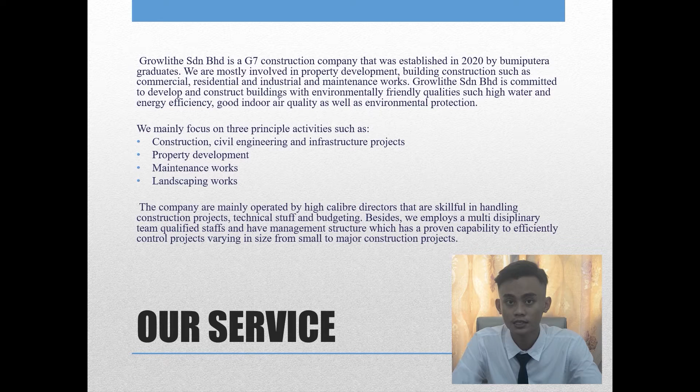Our licenses include SSM, which is Suruhanjaya Syarikat Malaysia, CIDB contractor license, and also SPKK, which means Sijil Perolehan Kerja Kerajaan.

To contact us, our address is first floor, lot 75, Jalan Kota Samarahan, Sarawak. Our telephone number is 082 966 120, our fax number is 082 573 491, and our email is growlithe@gmail.com. We also have our own website, www.growlithe.com.my. This is all from me.

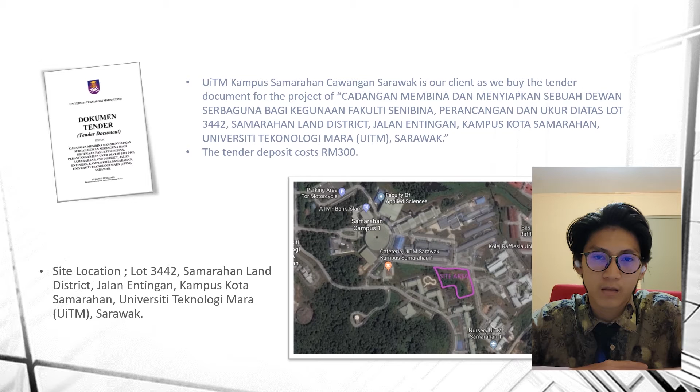First, the tender document. UiTM Kampus Samarahan Cawangan Sarawak is our client. We will buy the tender document for the project 'Cadangan Membina dan Menyiapkan Sebuah Dewan Serbaguna bagi Kegunaan Fakulti Seni Bina, Perancangan dan Ukur'. The tender cost is RM300, and this is the location of the site, which is behind Block G.

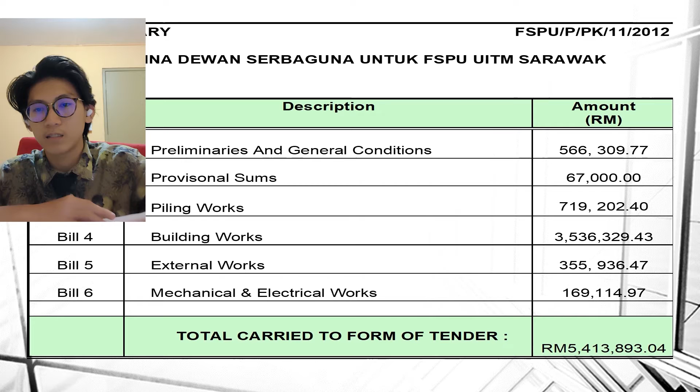Next is preliminaries, estimate, and build up rate. This is the final summary of our tender. It is divided into 6 bills: preliminaries and general conditions, provisional sums, piling work, building work, external work, and mechanical and electrical works. The total price of the tender is RM5,413,893.04.

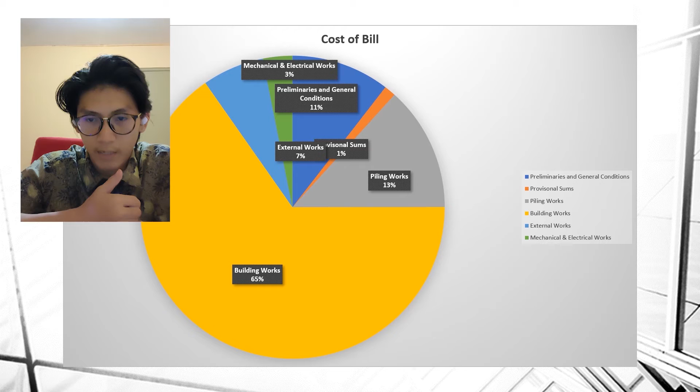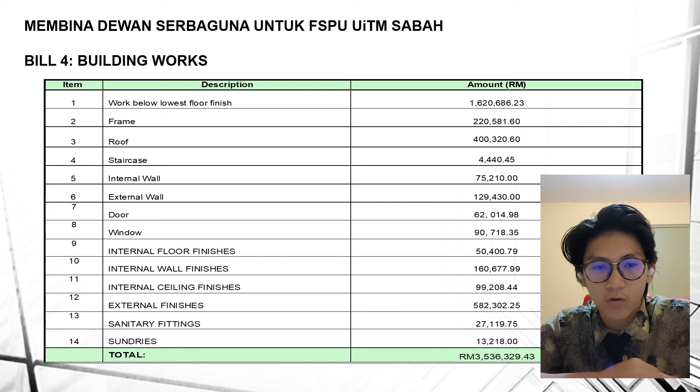Next, this is the cost of each bill in percentage. As you can see, the bill that costs the highest in this tender is building works, at 65% of the total cost of the tender. This is because building works cover most of the work in this project. There are 14 bills all inside building works, and they all require a lot of materials and labor following the design.

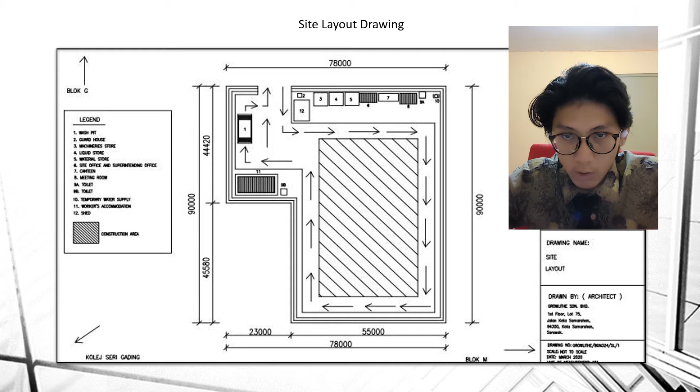So this is our site layout. The area of the site layout is 78,000 millimeters by 90,000 millimeters. The site layout consists of 12 temporary facilities: a wash pit located near the exit, a guardhouse at the entrance, machineries, liquid and material store, site office, canteen, and meeting room all in one line.

For toilets, they are in 9A and 9B as marked on the map. The temporary water supply and worker accommodation are behind the wash pit, and lastly, a shed is also one of the temporary buildings on this site. The site will be on the shaded area.

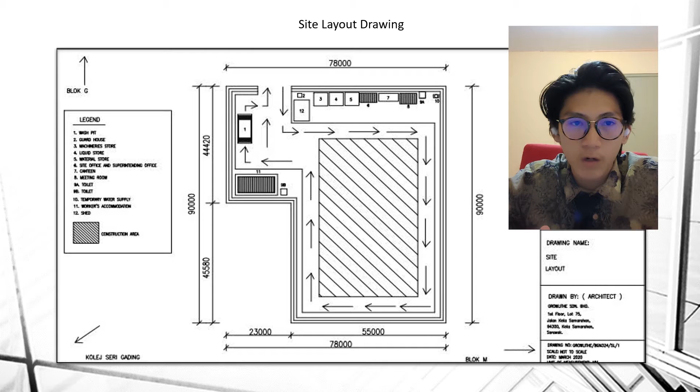Lastly, material suppliers. Our company has found a few suppliers that supply really good quality material at good prices. The best supplier for plaster render and screed coat is Hai Shun Concrete Sdn Bhd and Chuan Huat Group. Next, Sarawak Consolidated Industries Berhad supplies reinforced concrete piles. For ready mix concrete, we always get them from Cahya Mata Sarawak. Sarmaju Sdn Bhd is the supplier for brick and block.

We order doors from Seri Mega Industry Sdn Bhd. Next is Innovest Engineering and Corporation, which supplies geotextile, and PVC pipe supplier is Daiti Trading Sdn Bhd. Jubin BMS supplies tiles and marble. Nippon Paint Marketing Corporation Sdn Bhd supplies really good priced paint.

Next is Yang Kong Metal Work Corporation and Blue Corp Steel Sendirian Berhad, which supply and install metal, steelwork, BRC and steel bar. Lastly, KTS Timber Industry Sendirian Berhad is our favorite timber and plywood supplier.

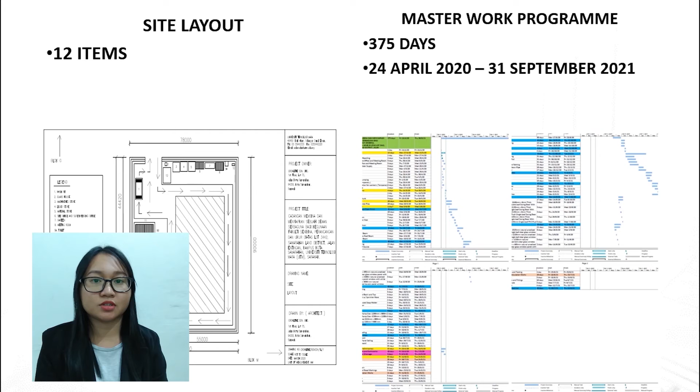Master Work Program is a tool for planning and scheduling a project that helps assess how long a project should take. For our project, the duration is 375 days, starting from 24th of April 2020 until 31st of September 2021.

The next item in project planning is cash flow. Cash flow is when costs will incur and the amount during the life of a project. It is related to the financial and physical S-curve. The S-shape is used to visualize the progress over time, plotting either cumulative work based on person hours or cost over time.

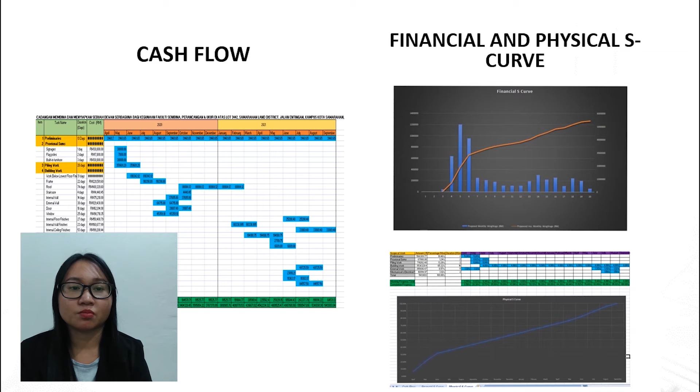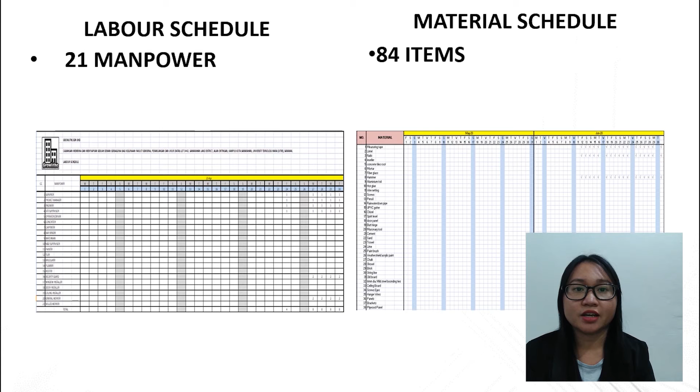For the labor and material schedule, there are 21 manpower for the labor schedule and 84 items for the material schedule. It is important to have the schedule when implementing a project so they can track the manpower and the material every month until the project ends.

Method statement is a description of how the work will be carried out safely. These documents are usually used for higher risk work to provide info to employees about how the work should be done and the precautions needed.

There are 14 items for our project in the method statements, with different durations in days and methods for installing certain items. For example, the installation of doors, the installation of windows, roof, and so on.

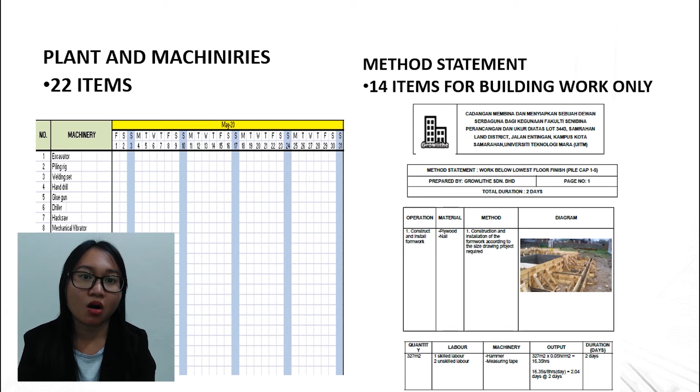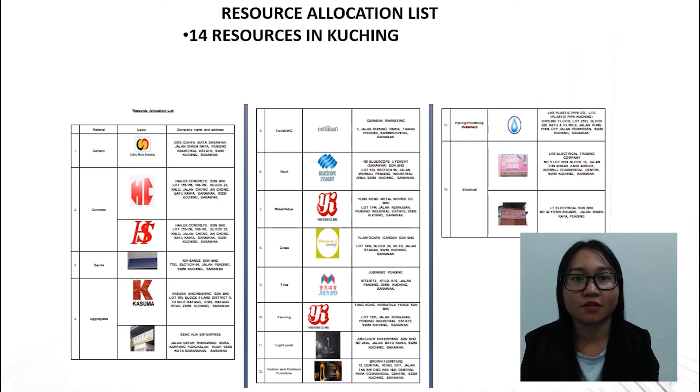Lastly, for our resource allocation list, our company has 14 resources in Kuching that supply 12 materials for our project. That is all from me.

Thank you. My name is Phoebe Saran Anak Rafael, and I'm going to present task 4, which is the progress report. In this task, I'm going to present the contract information, second the schedule for manpower, plants and machineries, and materials, and then I'm going to present the variation, the site safety and health report, the weather progress, and the progress photos.

First one is the contract information. As stated, this project title is...

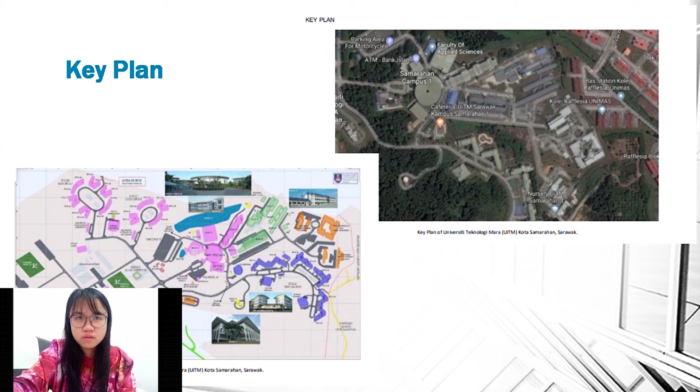Involved in this project is the preliminary works, provisional works, piling works, building works, and also the external works. So this is the key plan and the map for our university and also our site plan for this project.

The next one is the schedules for the plant and machineries, manpower, and the materials. This schedule is taken on the 6th month, which is September 2020. It shows that more manpower are needed in the 6th month because there are many works to do, and most of the works are done in the same month.

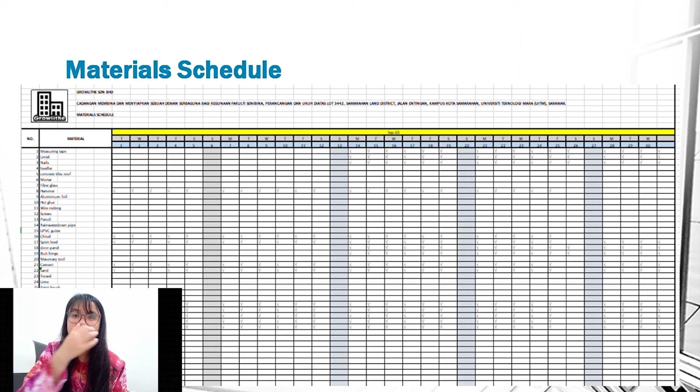Materials needed in the 6th month are such as measuring tape, lintel, nails, hammer, chisel, spirit level, door panel, butt hinge, cement and sand, shovel, bricks, string line, and oil board and mild steel bonding ties.

And as for the plant and machineries, the only things needed in these months are hand drill and the driller. The next one is the variation order.

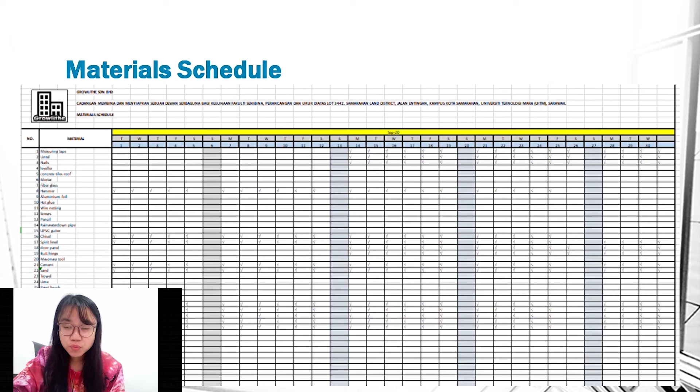The variation orders in these months are for the additional of tiles, changes of tiles, changes of finishes for painting, and also the changes for the type of the window.

The next one is about the safety and health report. There are construction netting, fogging, toolbox meeting, and also inspection in this report.

The first one is the construction netting. They are being installed to protect the people from being injured from falling from heights, and also the fogging is not mandatory, but it is essential to avoid some diseases such as dengue.

And then toolbox meetings are being conducted every morning to make the people and the workers aware of the safety aspect inside.

And for the inspection, it is being held by the site safety officer and also the staff from the safety and health organization.

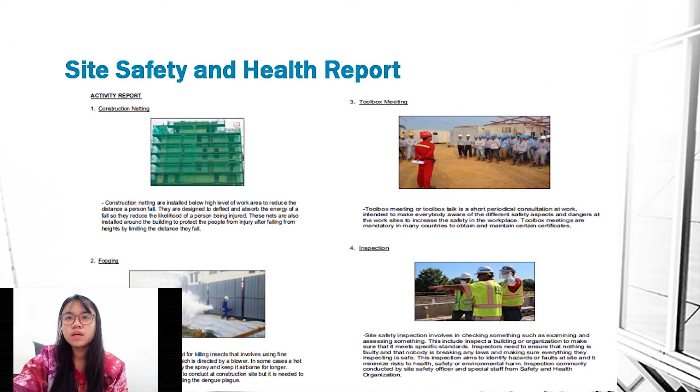The next one is the weather report. These are the weather charts for September 2020. The yellow one is for sunny day, purple for cloudy, and the red one is for the rainy day.

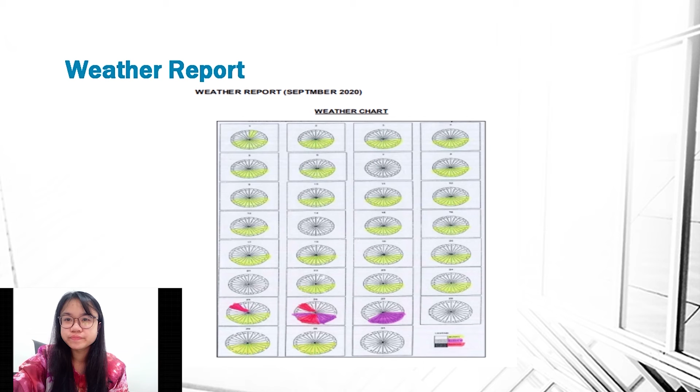And these are the progress photos for the month, which is September 2020. That is all from my presentation today. Thank you.

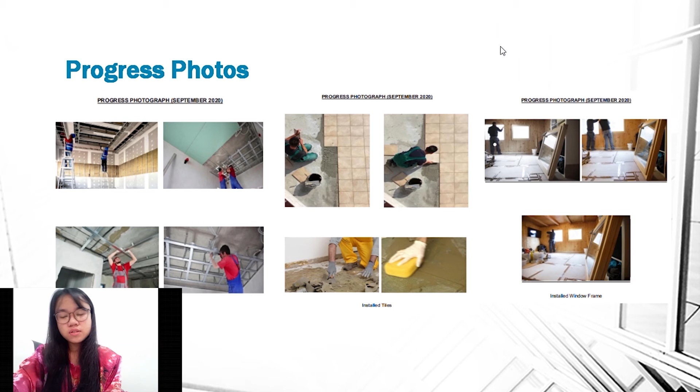I'm going to talk to you about our site organization chart for this project, our master work program, progress until September 2020, our progress claim for September, and our quality assurance and quality control.

Okay, as you can see in the bar chart there, the light blue bar is the task, and the darker blue bar is our finished task. So the darker blue bar represents the progress from the start of the project until September 2020.

As you can see right here, our preliminaries already done, and our provisional sums for signages, flagpoles, built-in furnitures already finished, and for piling works also already finished.

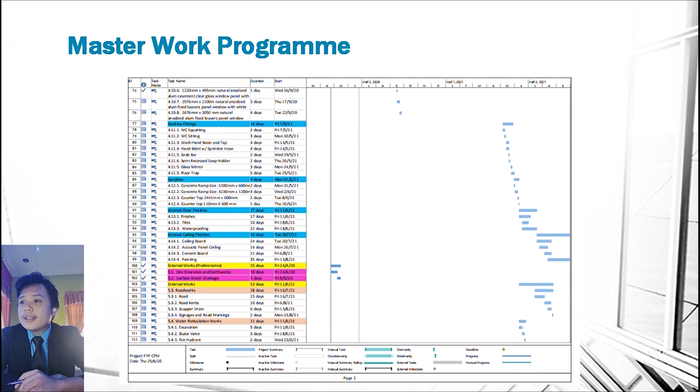The lintels almost finished, and all the windows already installed except for the 2676 millimeter by 3050 millimeter natural anodized aluminum fixed louvers panel window. That is ongoing. Okay.

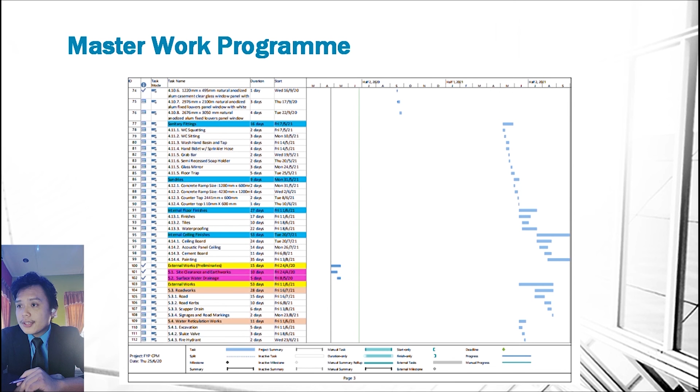And for external works, preliminaries are already finished, and all that's left is staircases, roof, internal wall finishes, external wall finishes, door, window, sanitary fittings, sundries, internal floor finishes and internal ceiling finishes, road works, water reticulation works, sewage reticulation work, and M&E stuff that is ongoing.

Okay, this is the progress claim summary for September 2020. The work done is building work for this particular month. Building works for as much as 4.08%.

That is 144,282.24 cents in ringgit Malaysia.

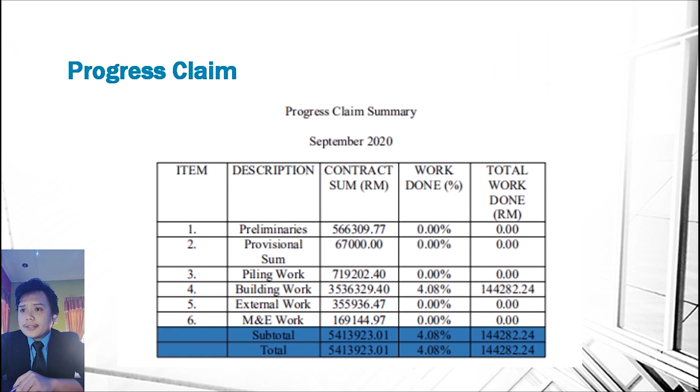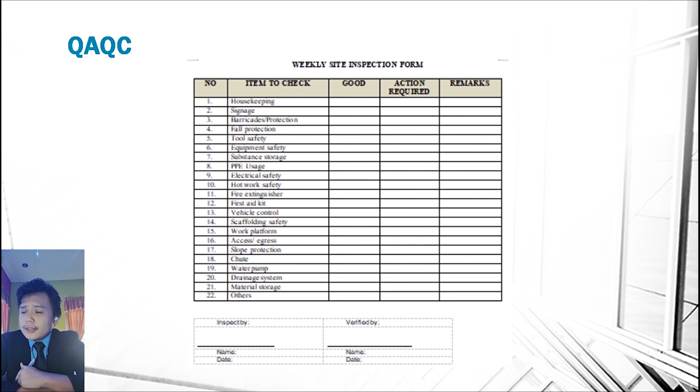And then if there is concrete casting going on, there's a form for us to check, to inspect. Use this form. Yeah, that's it. Thank you.